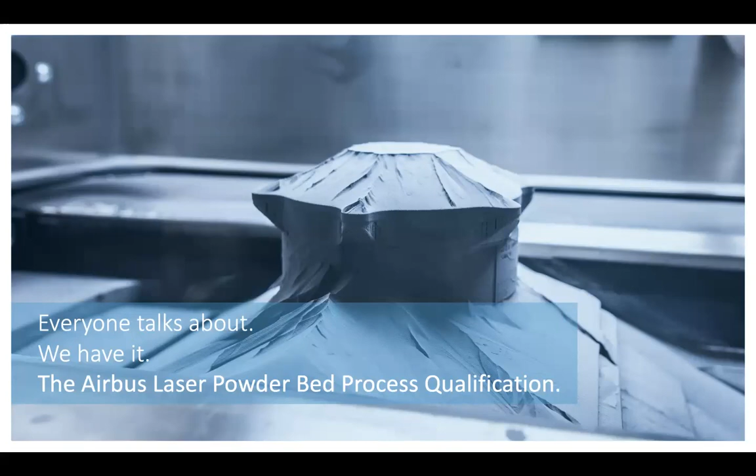And that's why right from the beginning, we never really focused on part qualifications, even though we also know how to do that. We nearly always focused entirely on process qualification for the laser powder bed process. So how have we done that? Meanwhile, we have this process qualification. We are approved from Airbus based on the latest AIMS, so Airbus industry material specification, and Airbus industry process norms. So we are basically qualified to deliver flying components up to a functional class 2.1.

You can see this below here. Functional class 2.1, for all of you who are not so familiar with aerospace declarations, is basically a fatigue loaded component. And how did we achieve that? Basically, you have to focus on one type of machine. So we, in this case, work with a Concept Laser M2 type system. It's a dual laser system. The build space can be seen here, 250 by 250 by 280.

Before you start such a qualification, everything needs to be predefined: the layer thickness, the gas atmosphere, the machine type, in this case the M2, the process parameters. And you're also not allowed to change this any time after you have done this process qualification, since otherwise you might lose it and would have to do a delta qualification again. So this is how we started it. This exercise is meanwhile repeated on other machine types as well. It's always the same procedure, just an additional effort. You have to print various coupons, test them, and I will come to that in a minute.

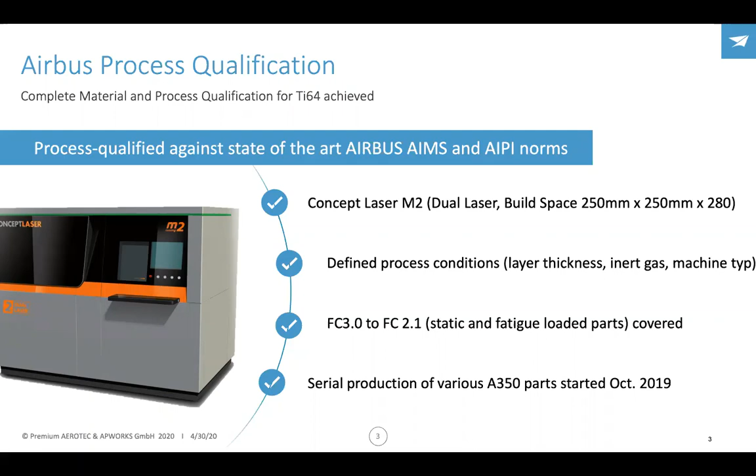What is the outcome of this qualification? Because in the end, it's not only about printing. What you finally have to do is you have to qualify the whole process chain. And as you might know, the AM process is just a little part of the whole chain we focus on.

So on top here, you can see the current environment. It's a rather old picture here. Meanwhile, we have 6 systems up and running for aerospace applications, some systems where APWORKS mainly focuses on for non-aerospace applications as well. But more or less, the process is always the same for aerospace components, at least for aerospace components out of Ti64. So this is the material of choice we started with.

We print the component. We apply either wire EDM or cutting. For Ti64, it's always wire EDM right now. Then we apply an appropriate heat treatment process, hot isostatic pressing, mandatory for all the parts we produce up to now. Then non-destructive testing in-house, chemical milling with the supplier. Then we do the machining in-house, crack testing, final surface protection in-house, and last but not least, the final QA.

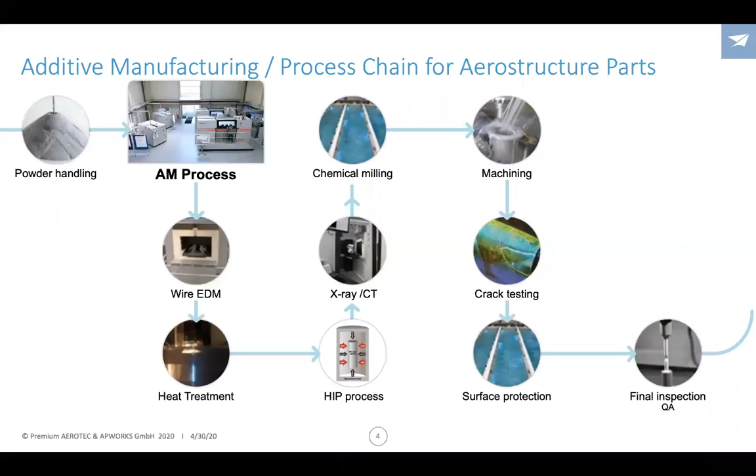And all these process steps are qualified, otherwise it would never work to finally deliver a component that will be placed into an airplane, no matter if we would do it with a certificate of conformity, so a COC, or an EASA Form 1, which is in most of the cases the documentation we deliver with the component.

As we focus mainly on Ti64, I just wanted to give you a quick overview of what we can achieve with the laser powder bed process, because sometimes we hear rumors in the marketplace that with additive we are not able to reach the quality criteria necessary from industry, that we know from annealed plate or forgings. But if you apply it correctly, in this qualified environment, these are real-life values we can easily achieve, and you see we are not too bad. So it is up to you to interpret these values and compare them with your own investigations.

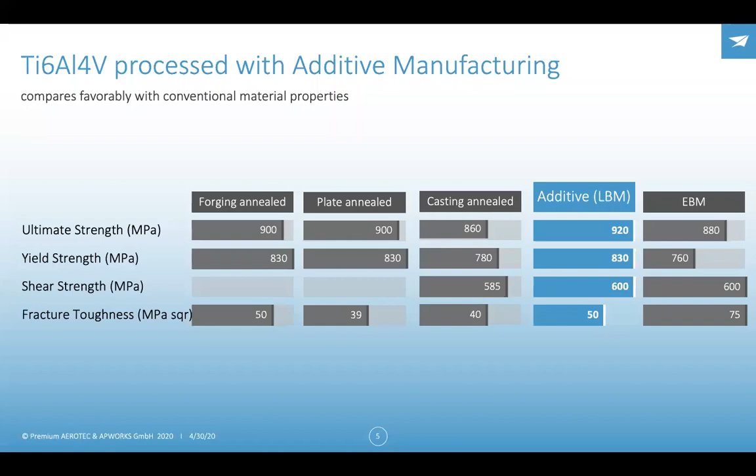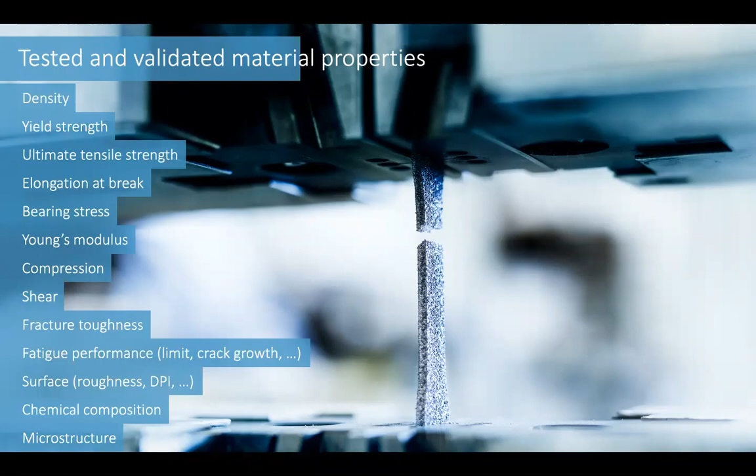Besides these basic parameters to justify if a material is built up correctly, we also tested various properties, from density to the more exotic ones: shear, fracture toughness, fatigue, limit crack growth, surface influence, chemical composition, the microstructure of the part, and samples. All of this exercise is there to demonstrate to the authorities and to our customer Airbus that we nearly have no spread in this process.

So if we would come up with A and B values, as you can see in the specification, for example for yield strength, we would have to achieve a yield strength of 830 megapascal. And overall, we are always above these values, always taking into account the statistics already. The same applies to ultimate strength and the elongation at break. This comes only with this very demanding test program we had to apply. The number of specimens, larger than 100, is just for a single test.

So more than 100 coupons at room temperature from the various process steps have to be produced, machined, and tested for each individual process step, to be really on the safe side that whatever we print fulfills even higher demands than traditionally known for plate material, which sometimes can be a little bit annoying, that we have higher demands on additive components than on classical components machined out of a block of material.

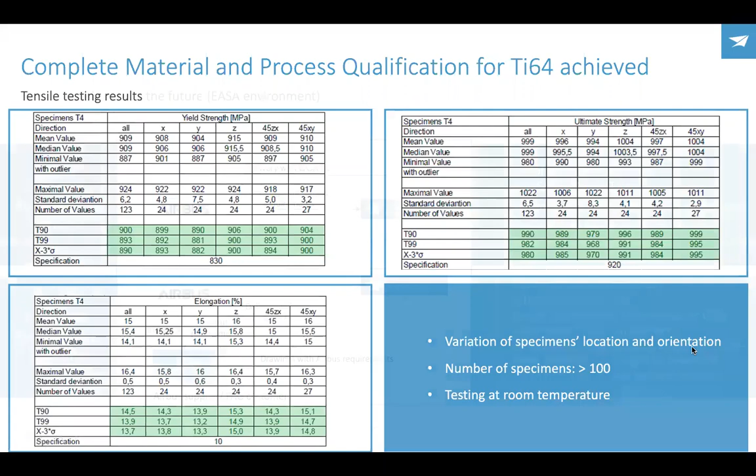Given that we now have this process qualification, it's not very difficult for us to work with various customers. Right now our main customer is Airbus. With Airbus, there are always two scenarios. In a build-to-print scenario, we take the part documentation and drawings from Airbus, and according to the drawings, we apply a build-to-print process internally. We do a first article investigation on new components.

A very specific set of testing needs to be applied, even in a process qualification environment. And last but not least, we will be able to deliver all these parts based on our process qualification with an EASA Form 1 certificate to the customer. We can also do this as a sub-tier supplier to other suppliers that provide components to Airbus.

So let's take an example. Liebherr, Lufthansa Technik, Moog, no matter who will supply a component to Airbus, we could easily supply this component to this tier 1. So in this case, we would act as a tier 2. We will supply the component with the EASA Form 1 according to the same specifications.

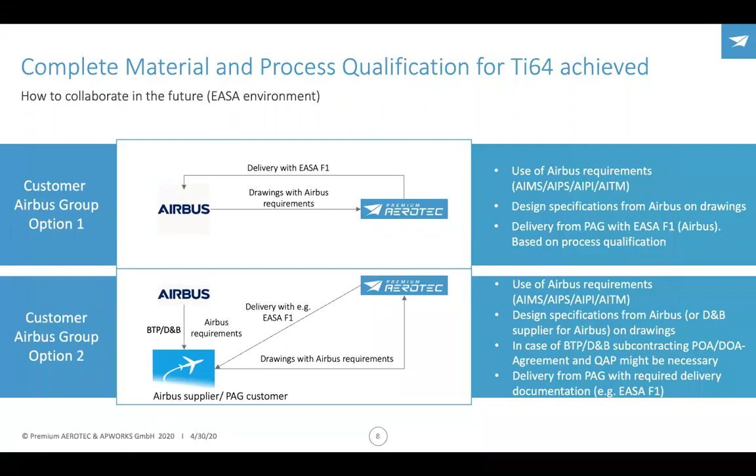And with such a setup, we can basically switch every component where there is obviously a positive business case overnight to an additively manufactured component using the laser powder bed process for titanium 6-4. And if you are a non-Airbus customer, this is just what I meant. There are multiple solutions we can help you with. Basically, we would never say it's not working at all. We never found any case where we had no idea.

Even with the FAA, we had multiple discussions. So if you are a customer working in the non-EASA world, it's also not a big problem. Most of the stuff, if not nearly everything we do for EASA, can be easily applied to FAA regulated industries as well.

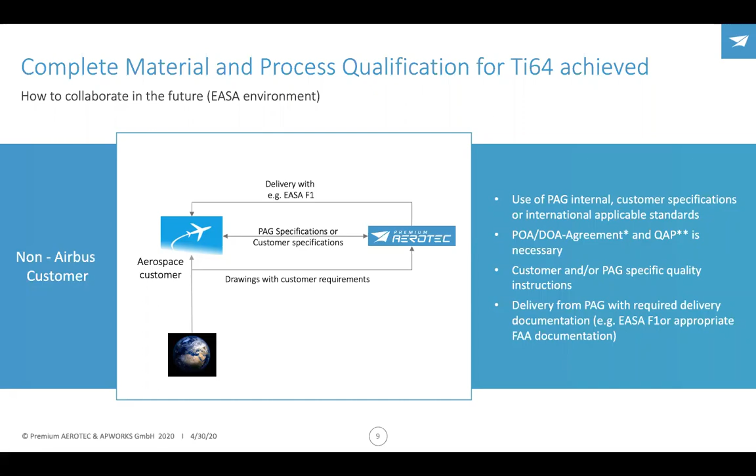So that's it, basically. To conclude, what you see here are one of the first A350 parts we qualified, and they fly in A350s all around the world. It's 3 components. Overall, it's 6 because they are symmetric, but it's in the end 3 part families, so to say, and they are out of titanium 6-4, and you will find them in the door surround area of every A350 flying around.

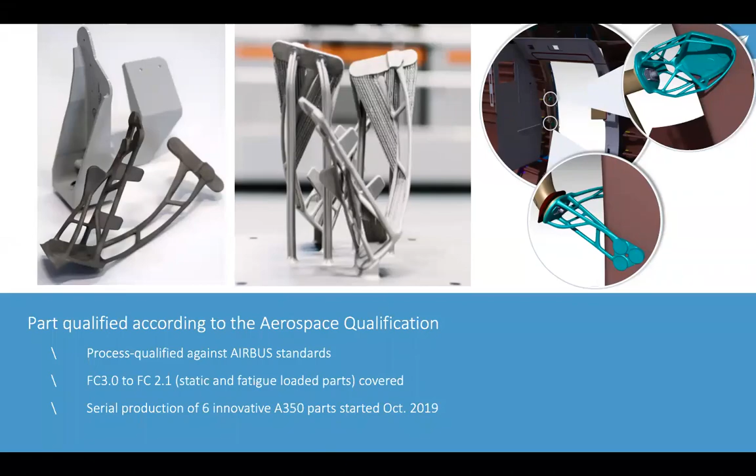So any questions? I hope there are some. You can find the questions in the Q&A, Joachim. Ah, yeah, okay. So do I have to type it or can I answer it? You can directly answer it. I will just read it and answer it. Yeah, exactly. Then every one of you hears it.

So Priyanshu is asking, is HIP in-house or with a supplier? Is it the only one? No, chemical milling is also done outside. So HIP is done outside with a supplier network. We investigated quite a lot if it makes sense to insource HIP, so hot isostatic pressing, but in the end, let's say the business case is nearly not given.

We would benefit a lot from the lead time decrease having HIP in-house, but from a pure financial perspective, it's just not an option for us right now. The amount of parts we have is not enough yet to justify such an investment. So I hope this did answer the question.

So Martin, you asked, are you able to redesign 3 classically designed parts and substitute them with 1 AM part, including Form 1? Yeah, definitely yes. We have the engineering capabilities, we have the process capabilities you saw already. So this is an easy exercise for us.